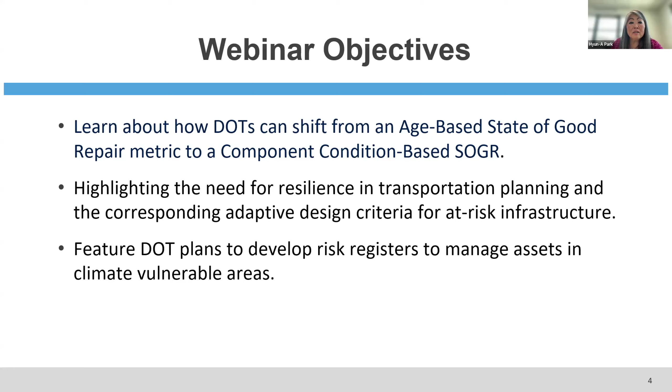I will introduce our speakers before each presentation, but in brief, they are Miguel Simon with the Connecticut DOT, who will talk about component condition-based traffic signals asset management program. Matt Versdahl with the Washington State DOT, who'll talk about life cycle planning for pavement and bridge assets at the Washington State DOT. And Maria Mutuc from Virginia DOT, who will talk about their resilient transportation systems.

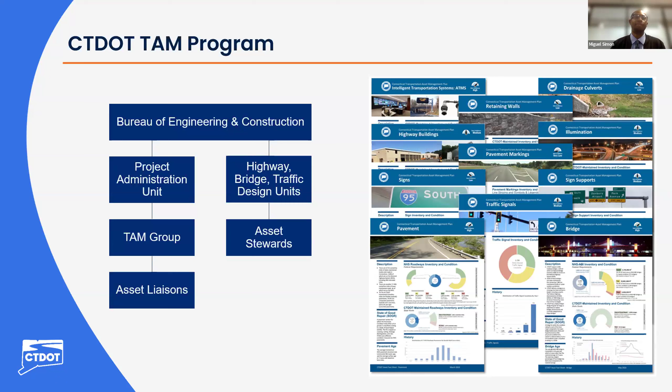Traffic signals were included in CTDOT's first TAMP in 2018. At that time, our state of good repair was defined by the age of the mast arm and span pole structures for a signal. While useful, this method has limitations. It's not necessarily representative of actual structural condition and did not reflect the condition of the other signal components. Last year, we were able to make the switch to condition-based state of good repair for traffic signals.

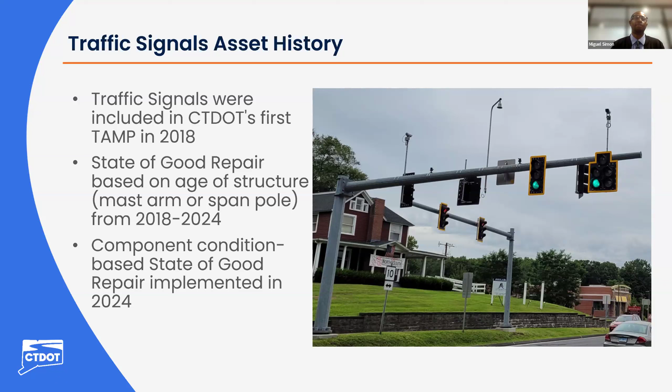Because of the early inclusion of signals in our TAM program, we have 7 years of network state of good repair history. The increase in state of fair and poor signals over time reflects the age of the structures, many of which were constructed in the 90s and were aging out of a state of good repair based on our initial state of good repair definitions.

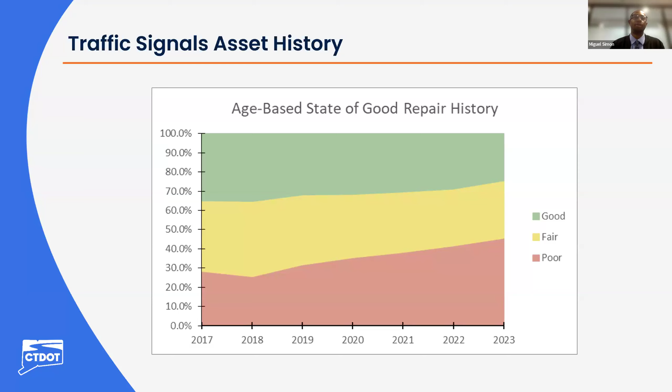But considering each component and inspecting our actual assets, we gained a more accurate understanding of the network's condition. This lets us plan with greater precision, ensuring that investment decisions and project prioritization are based on actual need, not just calendar age. The change to component condition-based state of good repair occurred alongside other enhancements to the traffic signals program, such as maintenance staff moving from a paper-based form to an electronic one, and the creation of a geospatial signals dashboard. With this approach, we hope that the component condition data can give us greater lifecycle information so that we can implement targeted preservation strategies that extend the useful life of the components and optimize funding for our signal network.

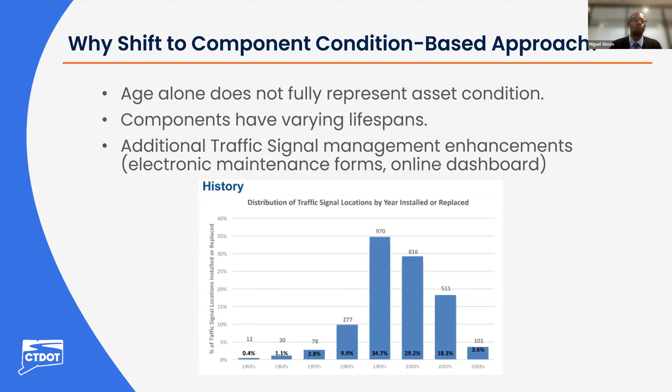The original state of good repair classified signals by age. Any signal structure 15 years old or newer was considered good. 16 to 25 years old was considered fair, and 26 years or older was considered poor. The system was straightforward, but was not perfectly correlated with actual structural condition and didn't account for component-level deterioration or component upgrades such as vehicle detection or cabinet.

In 2024, we transitioned to component condition-based state of good repair. We now evaluate the signal using 4 components.

This approach gives us a more accurate picture of our signal's network condition. Last year, we compared both approaches to the same data set of 2,795 CTDOT-owned traffic signal locations.

The component condition-based method resulted in a significantly higher state of good repair than the age-based method did. Age-based had 54% good or fair signals, and component condition rated had 84% good or fair signals. This is primarily due to the structures, which when inspected were found to be in a better condition than we had anticipated based on their age.

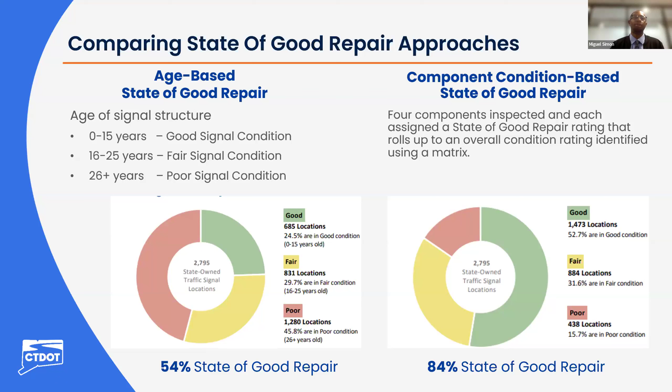The 4 components we assessed are structures like mast arms and span poles, signal cabinets, which include controllers and conflict monitors, vehicle detection systems, which include inductive loops and video detection, and communication systems. Each plays a unique role, and failure to any component can impact signal performance.

Different components age and fail at different rates. By evaluating each independently, we can identify a more accurate condition of our signal network.

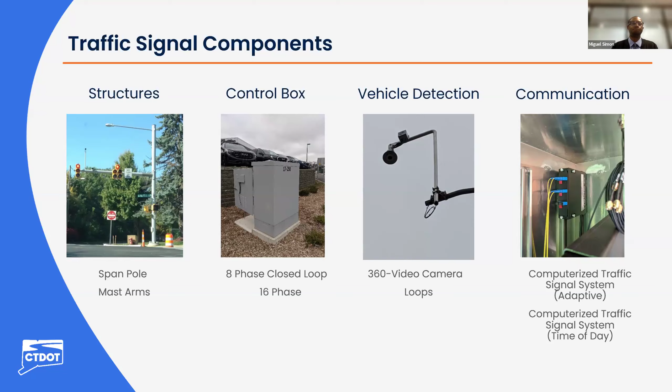Each of the 4 components of our traffic signal is given a good, fair, or poor rating. There are 81 different possible combinations of ratings. We arrive at a state of good repair for each signal with either a good, fair, or poor rating based on a decision matrix. This snapshot is not comprehensive of the entire matrix, but I want to note something not shown in this portion of the matrix. If the structure is poor, the overall state of good repair is automatically rated poor.

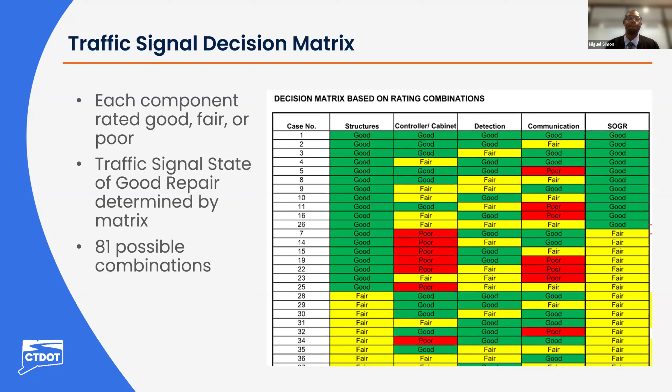The interactive traffic signal dashboard, which was created by a collaboration of the signals unit and GIS specialists at UConn, has a tab for state of good repair and links the geospatial information of our traffic signal network with the condition ratings. It allows us to view overall asset state of good repair, as well as the state of the various components.

You can see many of our structures are good and many communication components are poor. It also displays traffic signal install dates. This database serves many other functions for our signals team, including signal timing and maintenance work orders.

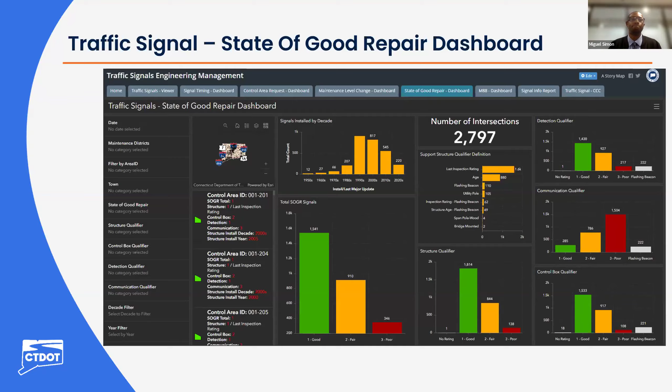Now that we have our initial database, we need to make sure that the data is current. The signals will be inspected on cycle, and the database will be updated as capital projects are completed or maintenance work is performed on the signals. We hope to use the data to identify trends in each component's life cycle. This will allow us to further refine the projections we create for our TAM documentation.

I'd like to end this presentation with some key takeaways. We found that a significant portion of structures we assumed were poor were actually in a state of good repair despite their age. We had an established traffic signal asset management program before we had the data and technology ready for the traffic signal database.

It was easier to change to the new component condition-based state of good repair within the existing program instead of starting from scratch. The traffic signals unit was already familiar with the principles of asset management and the TAM reporting requirements, which made for a smoother transition from age-based to component condition-based state of good repair.

While we think the decision matrix for the overall signal state of good repair is accurate, the complexity of the matrix has been limiting for some of our initial attempts to incorporate component life cycles into our projections. It makes any calculation more complex than Excel can handle. We may have still chosen the decision matrix method if we had known this in advance, but the ease of projections wasn't something that was considered during the inventory and condition development process.

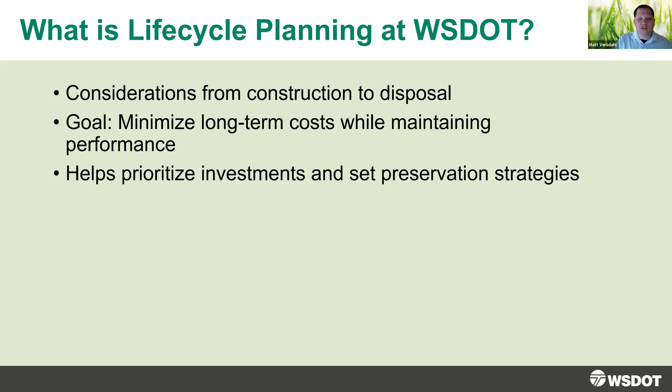So we use it to minimize our long-term costs, but maintaining performance. Really it's a balancing act of the right investments and the right activities to be able to maintain performance and extend the life of the assets. For us, it helps to prioritize those investments and determine different strategies.

Washington, like many other states, has a very diverse geographical landscape and climate. You have coastal regions, and even on the coastal regions you have different climates. Some are mountainous areas and some are not. Even our most populated city, Seattle, is right near a large body of water known as the Puget Sound. In the middle of the state, which separates east and west, is the Cascade Mountain Range, with a very different climate. All of those things can be taken into consideration for life cycle planning, and specifically what type of treatments and materials are used to do construction.

So when it comes to life cycle planning, we look at things like the initial construction costs, what routine maintenance is involved in the cost of doing that, when and what type of rehabilitation will be done, operational costs, and then end of life costs.

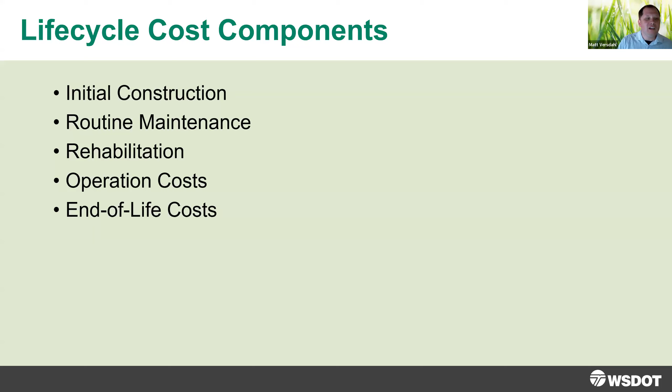We have some systems that we use to do this. Our pavement management system, which has actually been around for a long time, allows us to use different scenarios and historical data to model and see, based on the data, what things have worked in the past and what things we have done. Looking ahead in the future, we can use that data to model.

And on the bridge side, we have our Bridge Engineering Information System, known as BEISt, which can be used for different modeling for deterioration, maintenance, treatment, and similar things to what we do on the pavement side.

On the pavement side, for example, we use flexible and rigid pavement. Rigid pavement is concrete, and flexible pavement includes chip seal and asphalt. Again, because we have a pretty geographically diverse state, we can use that type of information to determine where, and also traffic volumes as well, to determine what the best solution is.

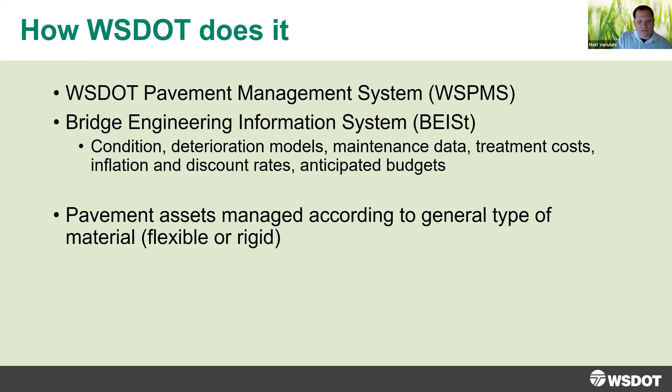Our life cycle cost analysis compares really the long-term strategies. We use the equivalent uniform annual cost, which allows us to compare things from today's perspective in terms of cost, looking ahead into the future and really trying to see what's the long-term implications of deciding on a strategy.

For example, it supports decisions like choosing a pavement type. Really, it's an analysis of alternatives, and that's one tool that is within our pavement management system. Here's an example at a project level of a tool that we have that's actually available on our website.

These are all made up numbers, I just put numbers in there for illustration purposes. But it really helps us look at things like initial costs, whether there's some acquisition costs, then design and construction, and looking at the next phase of operations and other annual costs, whatever that may be. Then getting into later in the life cycle where you have rehabilitation and salvage value, really trying to understand what's the best investment that we can make.

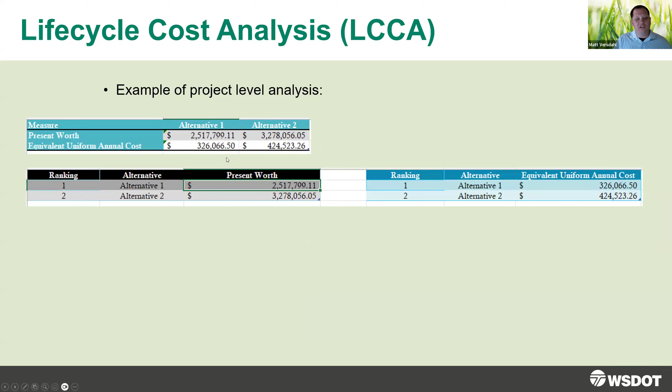The tool helps you look at present value as well as the equivalent uniform annual cost, EUAC, which helps you see in the long term what the operational cost is to keep it functional. This tool kind of helps you rank your different alternatives, and whatever that may be, you can add more alternatives too.

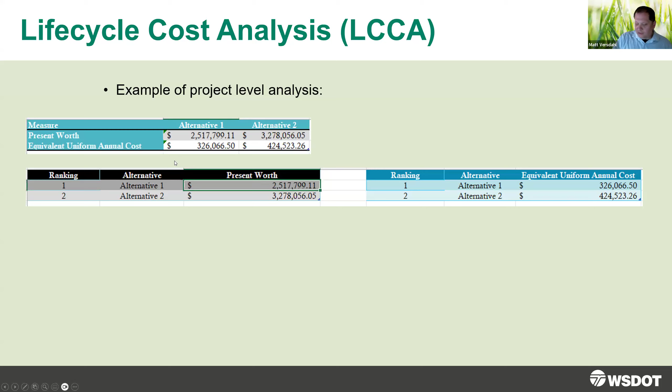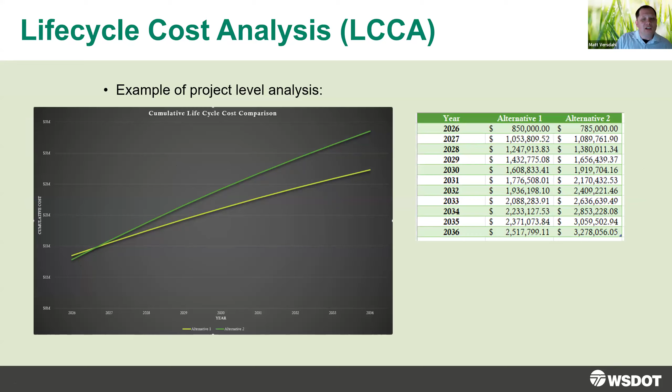You can see visually from the example here where the divergence goes, and after several years, one alternative shows that it's better than the other. This was just a 10-year sample, for example, and then this is another example of some of the treatment strategies we have for pavement and things we consider when looking at the life cycle.

The takeaway from all of this is really looking at all of the different variables and all of the different data and factors that go into managing these assets. So it's not just that initial cost.

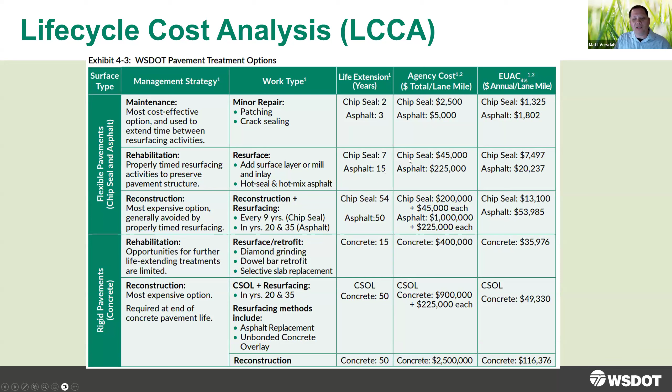So for Washington, we really look at which investment would be the best from a long-term perspective. That helps us make decisions on things like long-life pavements, and how we keep them functional.

And things like we've done chip seal conversions. Like I said, on the east side of the state we have lower annual average daily traffic, so we can do things like chip seal conversions versus asphalt resurfacing, which are a lot more cost effective. The previous chart kind of showed how we've done that.

Really another thing to consider in this is, at least in Washington, we have budget constraints. Normally you'd be able to do the expected activities, but in situations where you're budget constrained, you really have to look for solutions and alternatives and see what can be done to preserve the life of the asset.

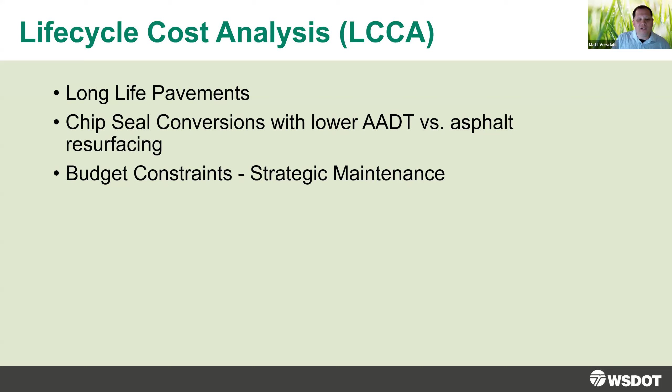Here in this case we call it strategic maintenance. That might be preventative activities, really trying to find the right treatment and be proactive, doing it at the right time—not too early, because then you lose some of that remaining life, but not too late either, because as time goes on it deteriorates faster.

So here's a summary from our 2022 TAMP of how this program and these efforts have really kind of shaken out. You can see there's been an actual cost savings based on that effort here—very, very intentional and strategic activities that allow you to realize some cost savings.

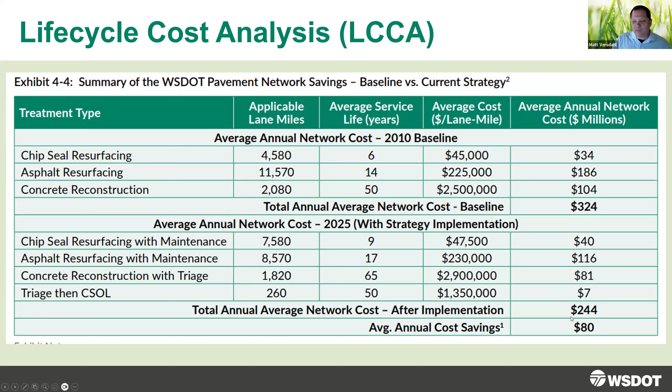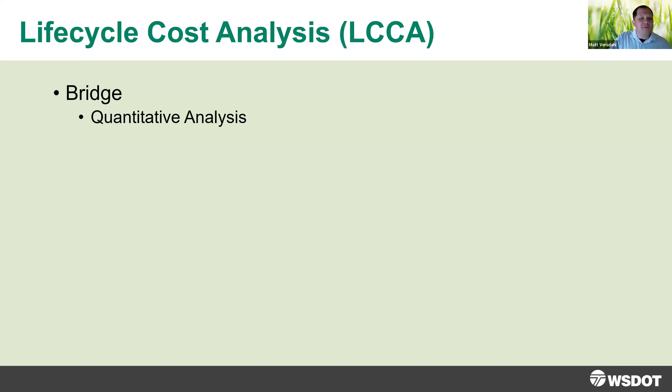I'll mention this too, on the bridge side, over the last few years—I don't have time to really get into all the details—but we have adopted a more quantitative analysis for bridge with our asset management. More to come on that in our forthcoming TAMP. One reason I bring this up is it really shows you this is an evolution when you look at life cycle costs. You can't just do what you've always done, but really looking at different options is critical in this type of analysis, and the same goes for bridge.

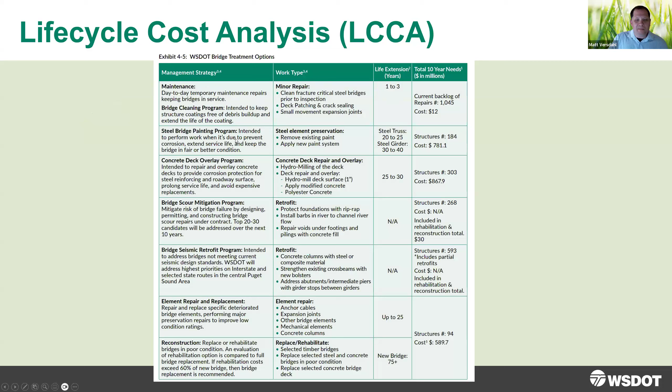We have various strategies that we look at that will extend the life of the asset, what the costs are, and how we use that.

Now I want to also talk about risk management and how we've applied that. We look at it from three different perspectives at WSDOT. First is the enterprise level, which has to do with achieving our strategic plan goals, and asset management happens to fall under our resilience strategic plan goals, so they're very closely connected.

Then you get more into the asset level, where we've ranked and created treatment plans using a risk register method. These help optimize the strategy because you're assigning the risk to a risk owner, identifying the root cause, determining a treatment plan, and actually documenting it—giving the opportunity to do an analysis on the risks, which can then be considered in your planning.

We've done this as a workshop style approach where we bring all the subject matter experts together and talk about the risks, then have them work on it for whatever period of time in between, and then come back together and refine it.

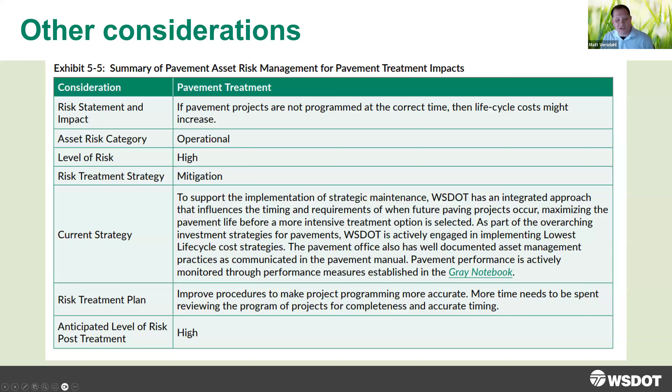An example of that from the TAMP is shown here on the screen, where pavement projects not programmed at the right time may increase life cycle costs. We look at the current strategy and the treatment plan, and identify what the impact would be if this risk is triggered.

Here's another example on the pavement side, resurfacing - same thing, identifying the risk and then what the implications for that would be.

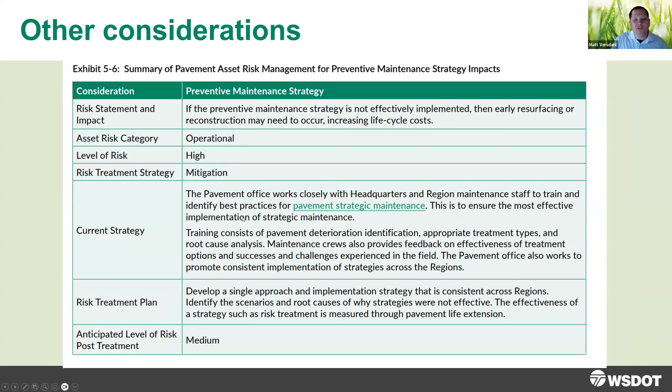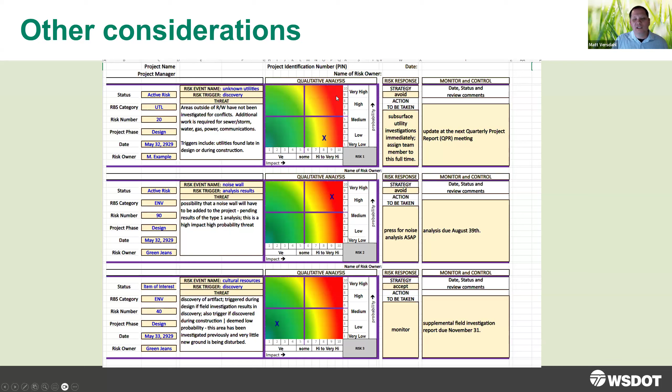We also have some more qualitative risk assessments on the project side. This is an example of where a risk was identified, and then the subject matter experts rank it in terms of whether it's low probability, what's the impact. Anything that's low probability, low impact may not necessarily be prioritized, but something that is high impact and high probability of occurring is something that can be prioritized in your planning.

Some of the things on the bridge side that we have prioritized in terms of risk are scour mitigation - that's one thing we pay attention to - and seismic retrofits. In Washington, we have seismic activity, so that's something we definitely need to consider in terms of vulnerability. We've also applied preventative maintenance.

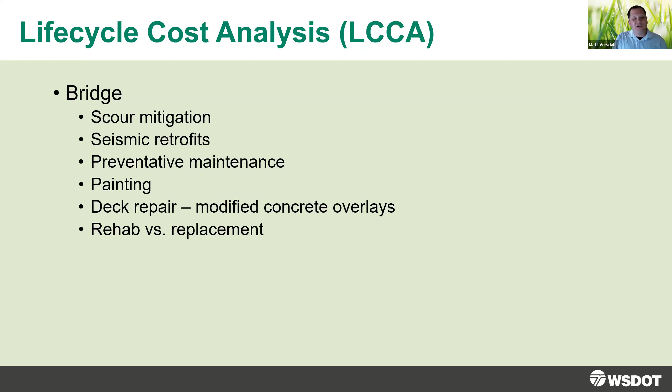Painting has been a tool we've used to preserve the life of a bridge asset. And for deck repair, instead of replacing the entire deck, you may do a modified concrete overlay. Of course, we have to consider things like when to rehab versus replace - if it's beyond a certain point, replacement may need to occur.

It's site specific, and the vulnerability will look at things like sea level rise, for example - we have ferry terminals in Washington, and that could also impact highways along the coast - as well as precipitation, temperature, fire, and of course seismic risk.

We also have another plan currently underway, our Transportation Resilience Improvement Plan. Those will again be some site-specific analyses that will look at some assets that could be at risk.

We're also currently underway with a terminals vulnerability assessment, which looks at things like sea level rise. We have a coastal highway vulnerability assessment underway, and even our entire I-5 corridor has an assessment underway. So while those may not specifically be created for the asset management plan, they are tools we can use in helping to plan and manage the assets.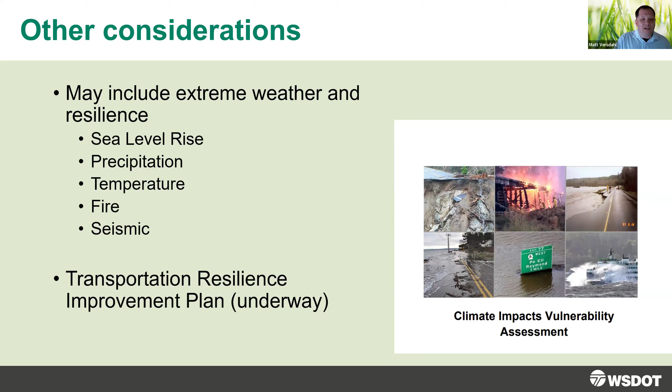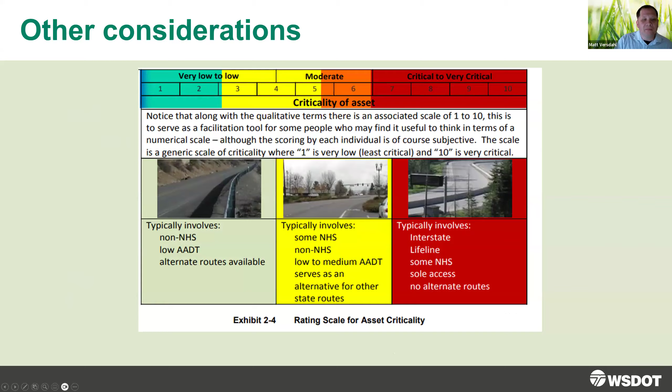So we use this kind of model of criticality and impact, and here's how we define the criticality. It's nice that it's color coded, because anything that gets closer to critical is more in the red category. We also define here what failure means and impact, and then this brings everything together - you bring the criticality and impact together and get an overall ranking.

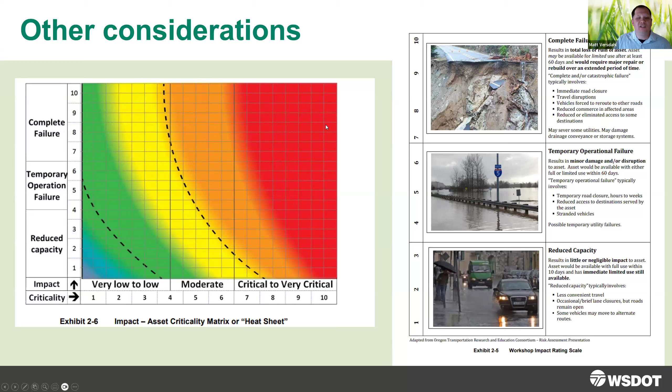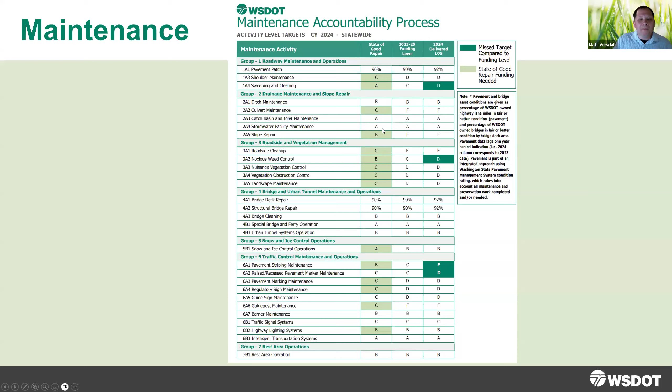It's useful for asset management because we can look at these regular evaluations. In closing, the key takeaway is that we're trying to achieve smart, cost-effective asset management. So I look at it as being creative, trying to find every tool you can use to inform your decision-making. We use all kinds of data models and field insights, whatever can help inform that. Really the result is longer life and lower cost for your transportation assets. And with that, I'll hand it back over to you, Hannah.

As we've all observed in recent years, we've been experiencing increasing natural hazards and threats such as extreme weather, which has translated to more frequent and sometimes severe flooding, which have led to increased asset deterioration and asset failure. It has also presented challenges to our operational maintenance and emergency management operations. So VDOT recognized the need to identify cost-effective solutions to address this problem.

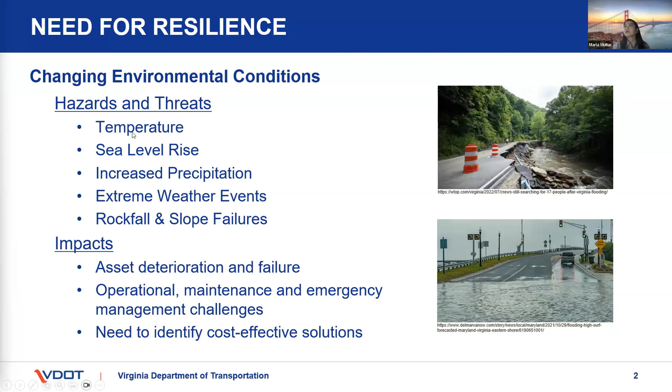VDOT was really not alone in recognizing this challenge, because we do have a large coastal community that has been and is being affected by these natural threats. So state, regional, and local entities have been working on resilience planning efforts and have really been coordinating with VDOT, asking us how the agency is planning on addressing these challenges. At that point, VDOT really recognized that we needed a plan to inform and align with state, regional, and local planning efforts, to make sure, one, that we're not duplicating efforts, and two, that we are, as much as possible, trying to make our efforts more consistent with each other.

Resilience has also been incorporated in some shape or form in some of our state executive orders, transportation planning, and legislation. One piece of legislation includes a stipulation that the Commissioner of Highways shall ensure resiliency is incorporated in the design standards for new construction projects. There's also legislation that stipulates that as part of our six-year improvement program, we should be identifying whether a project has been designed to be, or has committed to be, resilient.

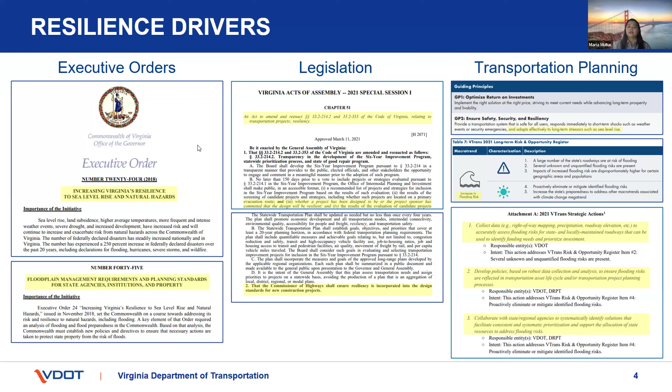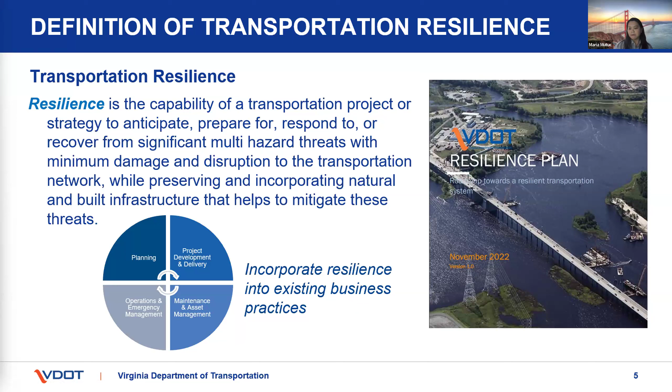In some occasions, we do need to seek the approval of our Secretary of Transportation and our Commonwealth Transportation Board for some policy decisions, if there are any policies we're proposing to alter or add. We are also supported by our Transportation Research Council that helps us with a lot of the research. We are dealing with a lot of uncertainties, and it's new territory for us, so there are a lot of unknowns. We have been fortunate to have the VTRC to help us with research related to resilience and changing conditions.

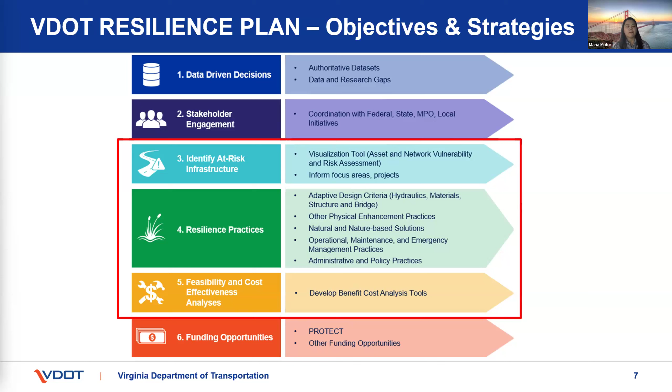As I mentioned earlier, we really want to be able to integrate resilience into existing practices. So we put together this integration of resilience into our existing business practices. It goes through how we're envisioning it to be part of our project planning process, how it's part of our project delivery process, and how it is envisioned to be part of our operations and maintenance practices.

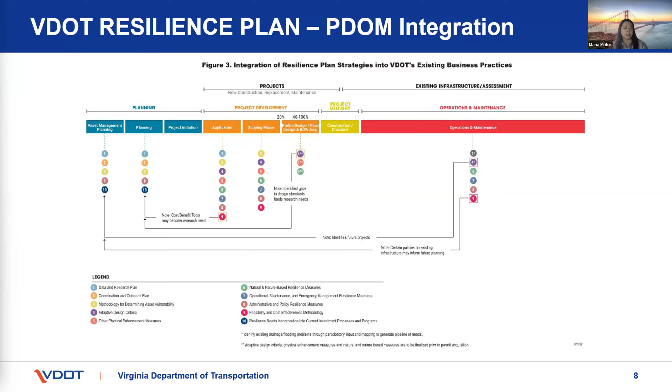We also have resilience objectives incorporated in our 2024-2026 business plan. Those two objectives are: one, to implement the resilience plan and its associated objectives and strategies; and the second is to maintain and strengthen the resilience of our infrastructure.

As I've mentioned earlier, the three important things we are currently focusing on are these three things. These three important tools we are currently developing are really geared towards answering three questions. Number one: which of our assets are vulnerable and at risk? Number two: how do we address vulnerability? And the third: which of the proposed solutions or practices will be the most beneficial and give us the best return on our investment?

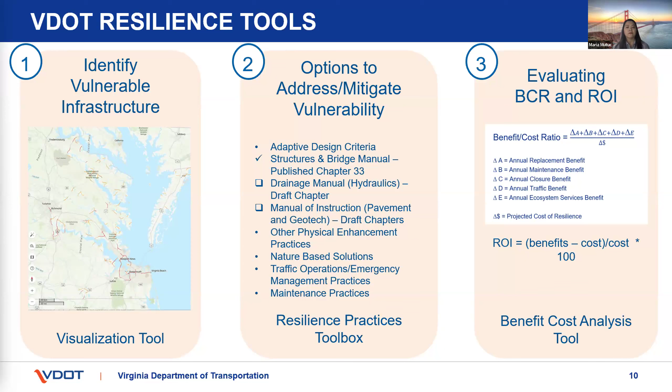For this presentation, I really wanted to hone in on one of our identified resilience practices, which is adaptive design criteria. The adaptive design criteria incorporates forward-looking conditions intended to enhance resilience of assets, extend the life of the asset, and decrease maintenance cost.

In February of 2020, our Structures and Bridge division published a new chapter, Chapter 33, which includes enhanced design criteria for climate change and coastal storms - considerations for climate change and coastal storms. This chapter includes the use of corrosion-resistant materials to account for increase in salinity, the use of a 20% increase in rainfall intensity when designing for deck drainage, and also the use of the 200-year flood as opposed to the 100-year flood event to account for increased discharge when designing for scour and buoyancy calculation.

For sea level rise, we are also increasing the mean high tide by 4 feet in tidal locations to account for future conditions, and also increasing the low chord elevation by at least 2 feet above the mean high tide.

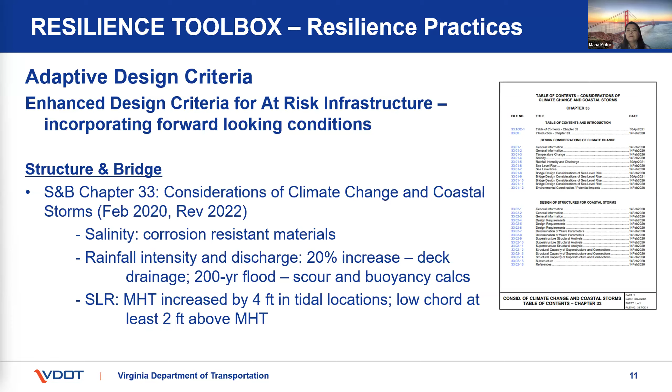Chapter 33 has been published and is in full effect. We have also been developing similar new chapters for our hydraulics, pavement, and geotech design manuals. For hydraulics, obviously the precipitation increase and projected IDF curves, for considerations for design of drainage and stormwater conveyance systems. For the materials division, we are also providing a new chapter for pavement design considerations, and also for slope and embankment design considerations for geotech assets.

We are also drafting reference manuals for some practices that we have not traditionally included as part of our process for designing roads. Some of it is natural and nature-based solutions, trying to give guidance on their use to help alleviate some challenges, such as wave attenuation as it relates to sea level rise and storm surge. There are also other physical enhancements we have not traditionally explored that we are looking at exploring, and we have been developing reference manuals for that.

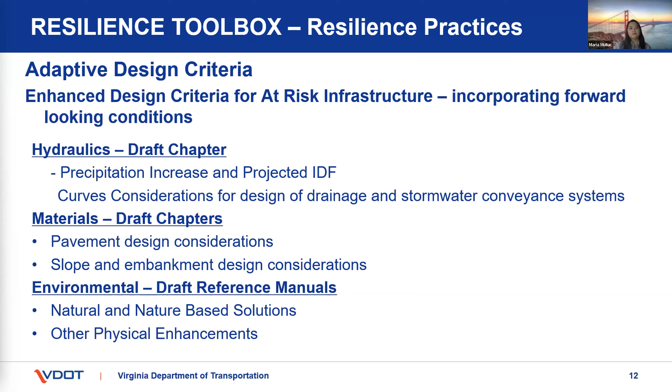So what I wanted to show you is a project where enhanced design criteria was used to enhance resilience of the asset and extend the life of the asset. This is the I-64 Hampton Roads Bridge Tunnel Expansion Project. HRBT connects Hampton, Virginia to Norfolk, Virginia.

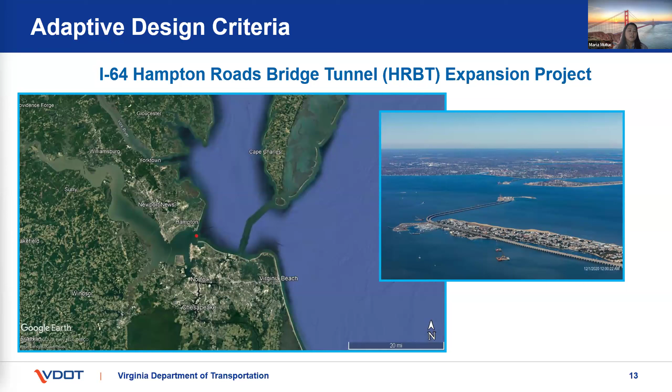And the adaptive design criteria, just to introduce the project, this is a $3.9 billion dollar project, and it is the largest highway construction project in Virginia's history. The project is in partnership with our region, and 92% of it is paid for with regional controlled funds, and aims to ease congestion along a nearly 10-mile corridor on Interstate 64.

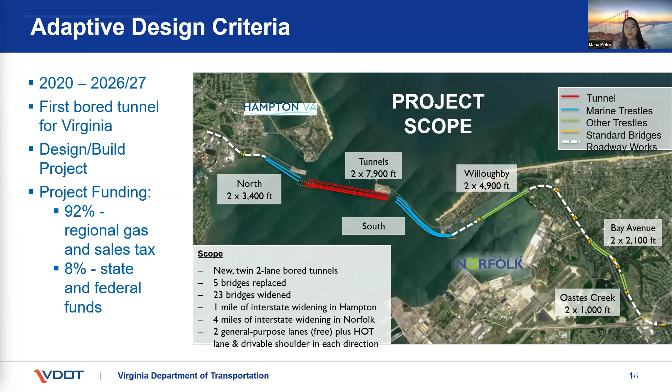Through the addition of twin two-lane bored tunnels under the harbor from Hampton, Virginia to Norfolk, Virginia, and also the widening of 4-lane segments. This is the scope of the project, giving you an idea of the elements: the tunnel, the marine trestles, the standard bridges, and roadway works. So again, it's a pretty hefty project for us.

So the adaptive design criteria that was applied and is being applied to this project started in 2020, and is expected to be done in the 2026-2027 timeframe. The enhancement being done for the project is higher structures to accommodate for sea level rise. In some areas, the structures are higher by 5 to 10 feet. In this picture, you can clearly see the difference in heights between the new bridge and the old bridge, and that's to accommodate for projected future sea level rise.

Also, the floodgates in the tunnels were designed for the effects of storm surge, so there was an additional 5 feet added to those floodgates and tunnels. And there is also an increased number of scuppers, or deck drainage, to account for future increases in precipitation.

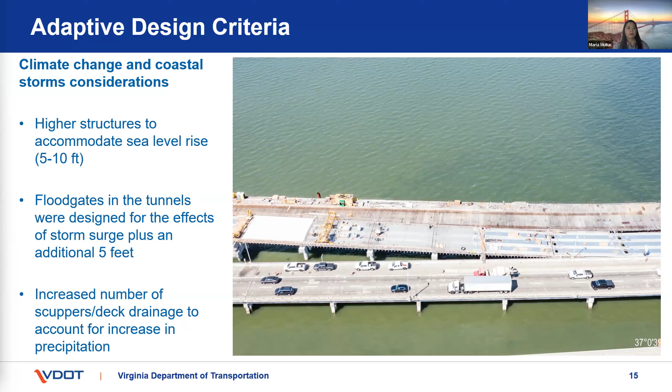The other change that was done, I think I've captured this - Chapter 33 does mandate or direct people to use corrosion-resistant and corrosion-free materials, for consideration of salinity and increased salinity considerations in the future. So the HRBT, the Hampton Roads Bridge Tunnel, did use these different materials that are outlined here.

And they are expecting a 100-year service life for this bridge with a combination of all the things I have outlined. So not only are they using better, more resistant materials, they're also incorporating forward-looking conditions to ensure this bridge will last us longer and extend its lifespan beyond the traditional or normal bridge lifespan.

And so I think the takeaway for us is that if you understand where your vulnerable infrastructures are, if you understand some of the practices and resilience options available to you, you'll be able to make smaller investments while you're already building a project. Granted, this project is going to cost billions of dollars regardless of the resilience enhancements. But I guess that's the point, right?

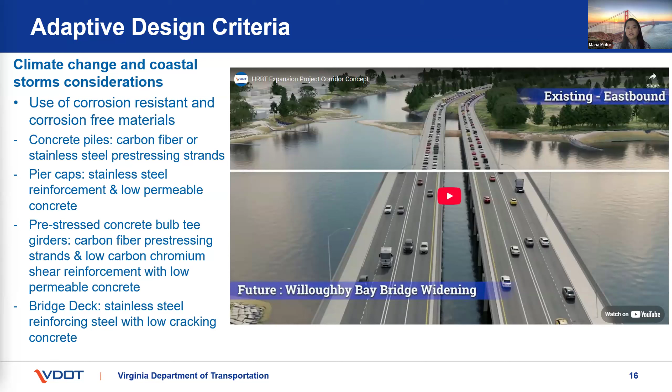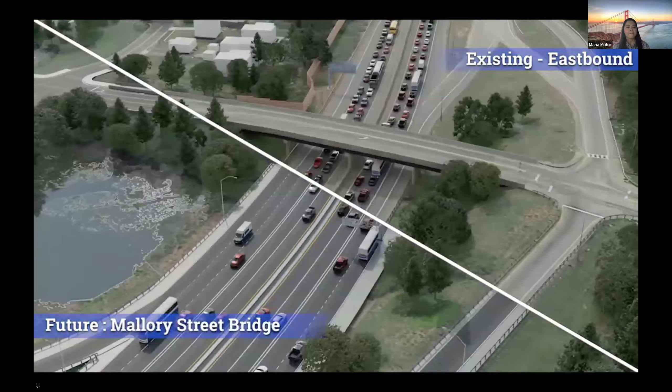The I-64 corridor is one of the most congested areas in all of Virginia, with backups often exceeding 6 miles during peak traffic hours. The Hampton Roads Bridge Tunnel expansion, the single largest transportation infrastructure project in Virginia's history, is being developed to improve traffic flow and support future growth.